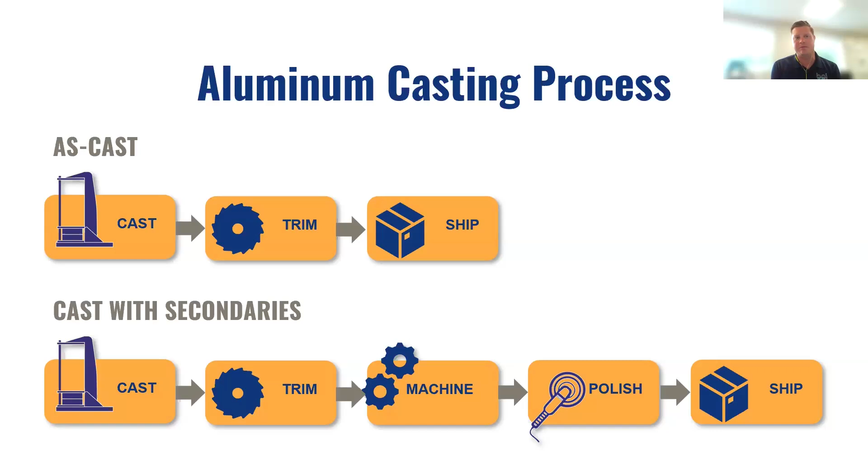So with a lot of the different operations you see there, are there any benefits that you would say for permanent mold or sand casting or die casting as you get into the conversation around machining? So when you're looking at machining across sand, permanent mold, and die casting, we'll start with sand. You're going to need more of what we call machine stock allowance, extra material that can allow for some variance going from casting into machining. Whereas on the far end with die casting, you're going to get closest to the shape you want, near net shape on the casting.

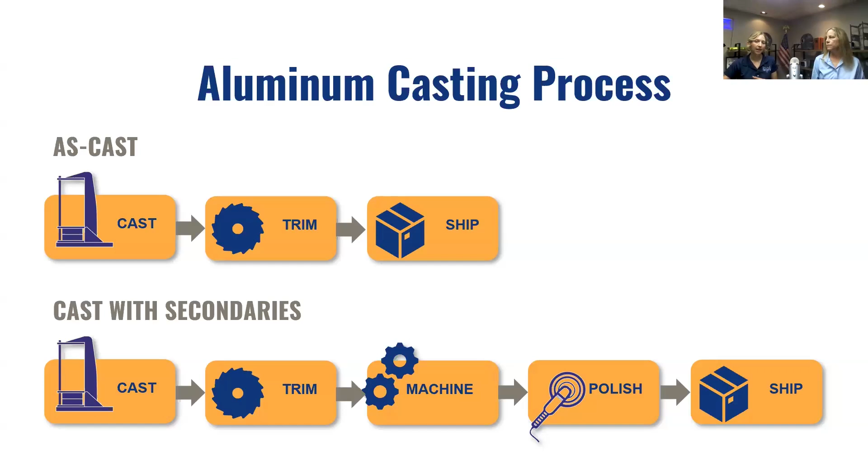So you can go with almost minimum to no machining on a die casting, depending upon what the part looks like. You might just have to do drill and tap holes with die casting. But there is one caveat, and that's the size restriction when it comes to sand versus die casting. Permanent mold falls right in the middle, a little bit of a sweet spot where you can get tighter tolerances than a sand casting, but not quite as tight as die casting, and you can hold a larger volume part.

So with that, different casting processes lead to different benefits, pros or cons from both sides, right? So talk a little bit about why you would need to machine a casting if you're designing a casting coming out of the mold. Is it ready to be assembled?

I think there are instances where the parts are ready to be assembled, but often we find that our customers need features added or removed on that particular casting. We can talk about features such as tapped holes, through holes, cleaning up the plane of the part so it may match up to another part. And we're able to apply better tolerancing when we machine it as a secondary operation. So that's a benefit there, Tim. Stephanie, I think this morning we actually had a really good conversation around this too.

Going back to the design of the casting, you mentioned some of the hole features and reasons why you would machine from that perspective. But sometimes there are features that you need to get a casting out of the mold, or the way you need to produce it from the casting perspective, that might not fit the final product. Can you talk a little bit about that?

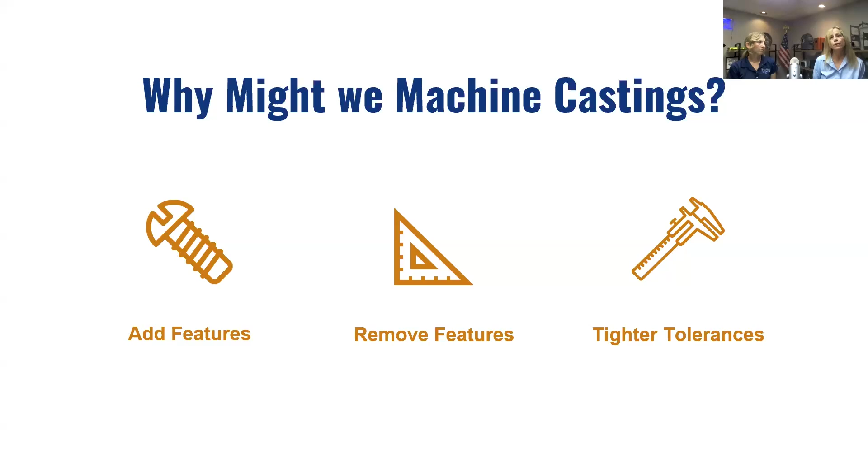Right. So Batesville Products specifically has a 3-degree draft that's necessary for our parts to eject from our presses. If a customer calls out for something less than 3 degrees, we're able to machine that material away from the casting to create the tolerance needed for our end users. So what would be an instance where your casting comes out and you want to put it into an automobile, or on a lamppost, or attach it to whatever your end application is?

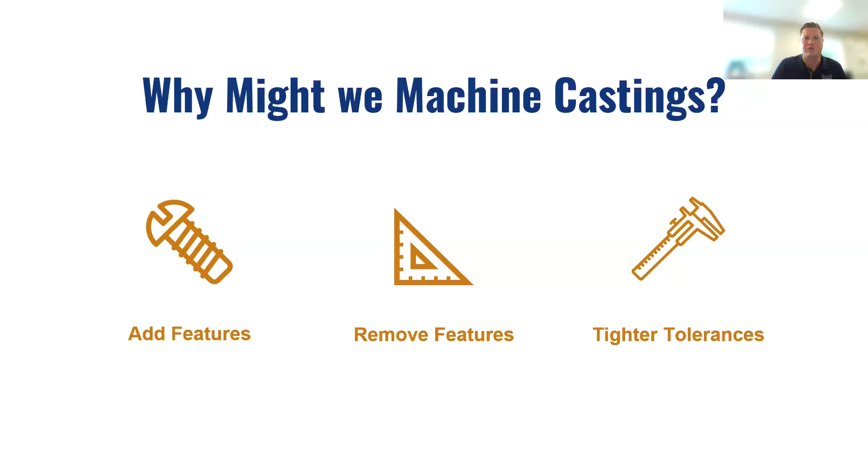Tolerancing is obviously a very critical feature, a very critical point for end customers, and you're not going to get the same customers having items where they're coming off ready to assemble. So oftentimes you get into the tolerancing side of it. Can you guys talk a little bit more about that side of the machining?

Yeah, sure. So with permanent mold specifically, you're going to have to add different types of tolerancing based off of the parting line. So you're going to have a tolerance that goes from one parting line to the end of the casting, or even crossing over the parting line. So for example, when you're ejecting a part, your parting line is going to look like this. It's almost going to come to a cone so that you can cope and drag, pull the part out of the mold.

So depending upon the length of the part, you're going to have to add in more draft, less draft the longer the part is, and the shorter the part, more draft. So that's going to be some specific tolerances you're going to need to help eject the part, and then you can go ahead and machine some of that off if you don't need that draft.

And then also, for example, when you machine a casting, it's a near net shape. You're not going to have 100% the part you have designed finished when it comes out of the mold. So that's why you add machine tolerancing on, so that you can go in and finish it to the spec that's needed. And we always say it's really important to call out what your critical features are and what is maybe okay to be as cast, because then it's going to give you a little more allowance.

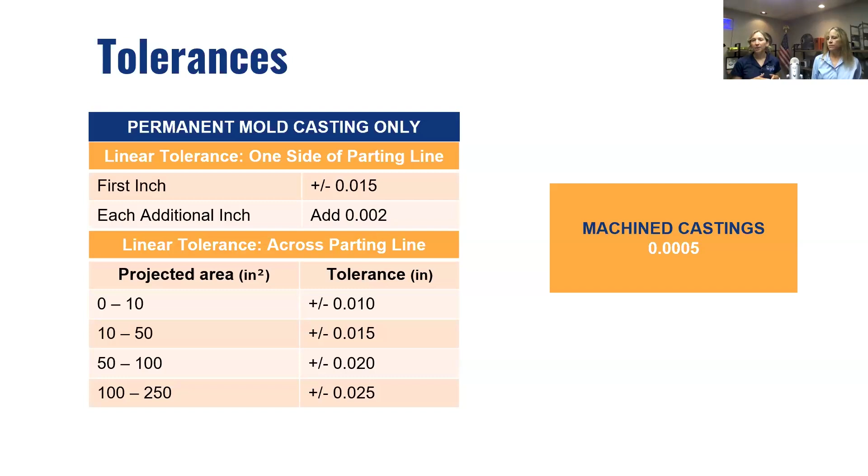At BPI, we use only one material, so we know exactly what type of materials we're using, and we use continuous melt, so we're not cross-contaminating materials. So we also, for example, at BPI, have material certifications that come with the metal as well.

Absolutely. Stephanie, can you talk a little bit more about when a client or a designer would explore machining aluminum casting? Definitely the sourcing, if we wanted to talk about that real quick, Tim. Batesville Products is a one-stop supplier. We offer the casting and the machining. When an individual is designing this part, they should consider its end use.

...and would likely want to come to us after the prototyping phase so that we can institute a long life part. Rachel, can you speak to benefits that you see? So Stephanie had mentioned sourcing. So if you have a shop that kind of does the full gamut, what benefits would you see if somebody is doing both the machining and the casting?

Well, you're keeping all of the quality contained to one supplier, so you're not having to manage multiple suppliers and then the finger pointing of who is in charge of handling the issue. Is it the caster or is it the machine shop that caused the issue? When you have one source, you're keeping that all under one roof, and they can more than likely solve the problem before the casting even leaves their facility.

And then also when your foundry is machining the casting, they have a better understanding of how the mechanics of the casting works. So like all the different types of flex that you see when you're machining a casting. So for example, when you're clamping a casting into a machine and then you're releasing it, it's going to have some of that bounce back, and they're going to understand the type of tolerances needed for when there's parts under tension versus when it's not in your machining.

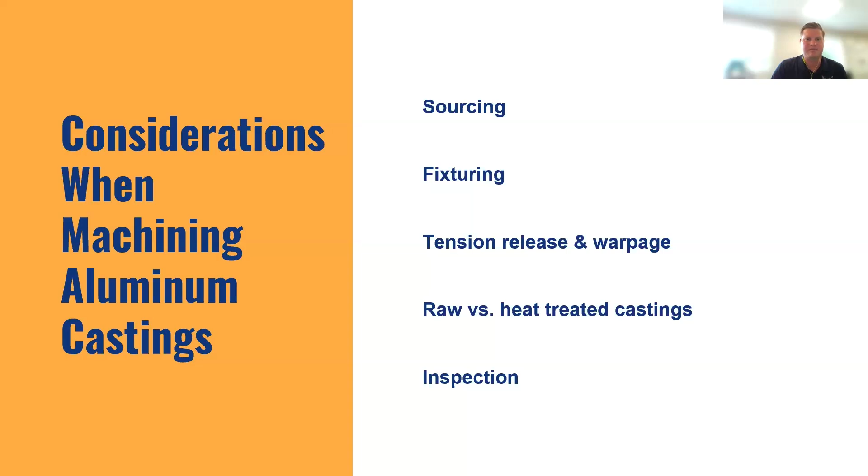Is there a time where you would cast a product, Stephanie, and you would make it bigger than it ends up needing to be? Yeah, absolutely. Having the machining centers that we do at BPI allows us to design that way. It allows us to capture the cope and drag that's needed and the sidewall tolerancing that's needed, and also allows us to create a functional part for our customers.

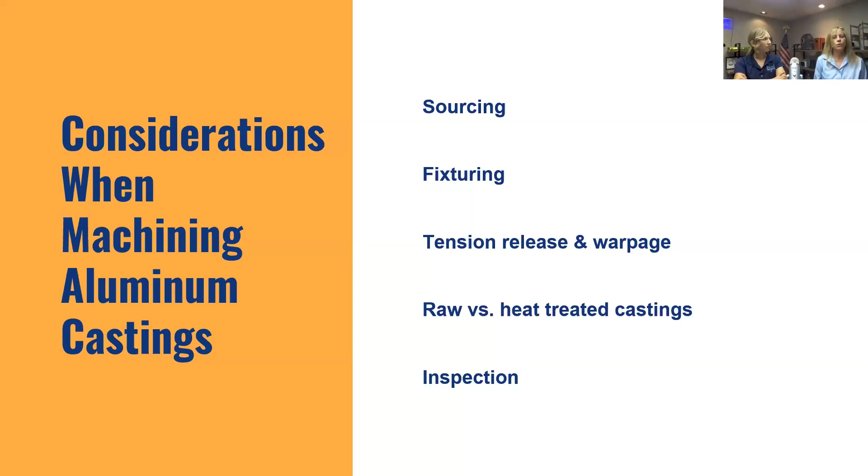Absolutely. So we talked materials, we talked processes. What would be some of the differences that you would see from machining out a billet versus a cast product? I think we can talk about aluminum bar stock for the most part. Yeah. Billet in other terms. Casting from ingot is obviously the permanent mold process, but on the machining side of things, that's a much longer process. It's obviously usually high dollar, especially in long run production. So we usually advise to do the prototyping portion out of billet and then transfer that design, once signed off on and the FAIs are completed, to a cast situation.

Yeah. So I believe that virtually every material can be fabricated or machined, and the same would go with the permanent mold situation. We only cast A356, but we know that there's iron and steel castings. And when you're talking about material differences, strictly aluminum, machining from billet versus casting from ingot, billet goes through a different process when you're creating it than it does from ingot. So, for example, you're gonna have different grain structure when you're getting a machined part from billet, as well as slightly different mechanical differences. Granted, I'm not a metallurgist, so I'm not going to go into the details of it.

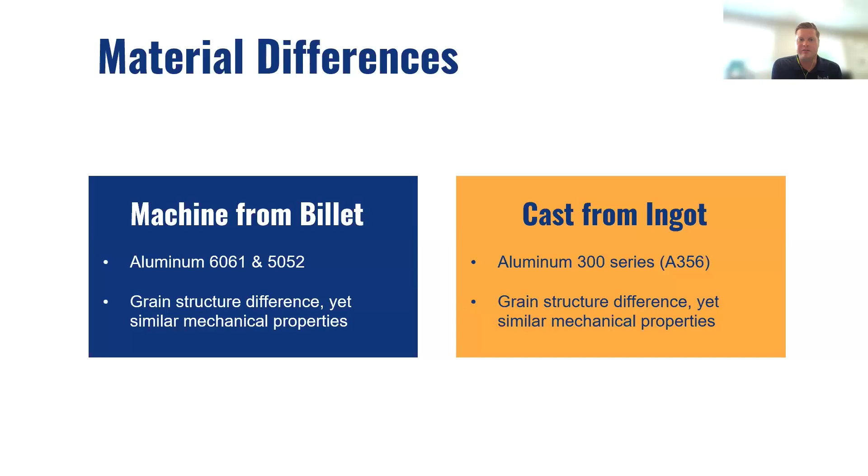And there's also going to be more gas in the cast part than there will be from a machined from billet part. That's correct. I think that's a good point, Rachel. Not all materials are going to machine the same. So when you're talking billet from ingot, but even if you're talking, what you had mentioned earlier, A356, and then you heat treat it, it's still going to machine differently, even though the material composition of that aluminum is still the same. There's different impacts that you get from those processes as you continue down the line.

Can you guys talk about the differences you may see from a design perspective? Yeah, so for machining from billet, you're going to be limited on the size of the billet that you purchase, and then also the footprint of the machine. But with that being said, you can get down to extremely tight tolerances when you're looking at a machined from billet part, but you're also going to get cost that comes with it.

Now, when you're machining from a cast part, you're looking at a different size range. So you're not limited on the size of the casting unless you're looking at a specific casting process. For example, you can cast as large as you want when you go with a sand casting. But with that being said, there's features that are going to have tolerance requirements so that it can cast properly that you're going to have to go back through and machine out.

But that being said, you're going to have a lot less machining to do and a lot less material waste because you cast to shape and then you machine in the features that you needed after that. Whereas when you machine from billet, there's a lot of material waste that happens.

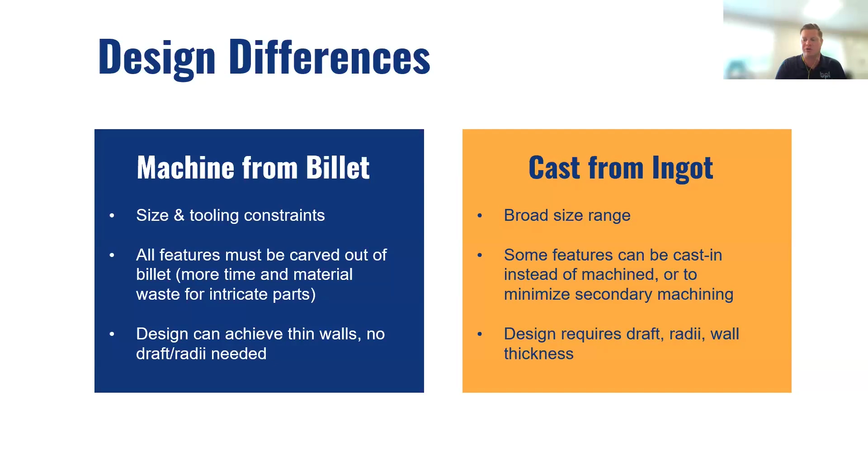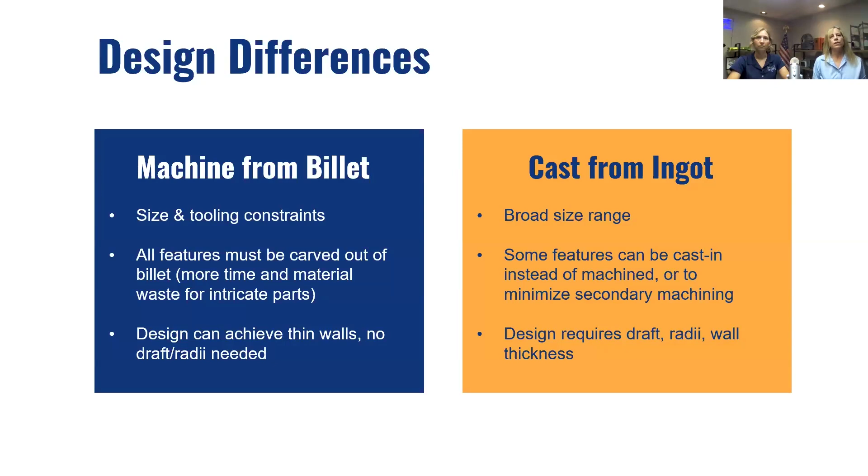With that being said, it sounds like there's pros and cons to both. Can you guys talk a little bit more about why and when you would choose one process versus the other when it comes to billet or casting? I think really it comes down to quantities; that's really where we see the difference, and whether you see a return on investment with one process versus the other. So you're not going to want to tool up if you're looking to make 3 to 5 parts in the whole lifespan of the product, to a certain size extent, of course.

So, for example, prototyping would be a great way to go forward with a machine from billet. But I will have to say there's a lot of foundries out there who are now starting to do 3D prototyping, so they can 3D print sand molds pretty easily so that you can cast the part for prototyping. So I think really quantities and the complexity of the part really drive what process you're going to choose.

So do you guys want to talk about the difference there between benefits you get? Rachel, you mentioned quantities. You guys want to talk a little bit more about what benefits you see from a casting perspective than what you see on the billet side? Sure, go ahead. Well, I was just going to speak on the material waste.

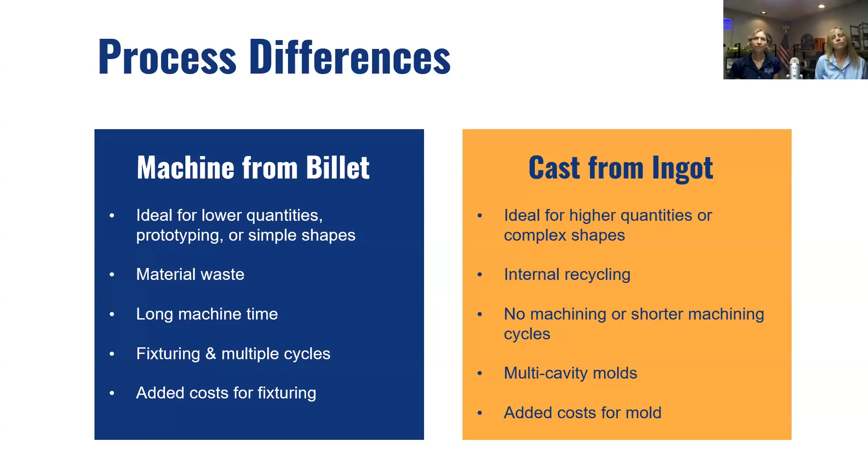Right. Removing the porosity levels in our mixtures, which BPI has automated now, eliminates any gases or any defects that could be hidden inside the part, which would then reduce its tensile strength. Yeah, I think Mike, to add to their comments, really doing an FEA analysis on your casting helps you understand if you're going to have shrink or air entrapment or anything that you can solve out of the casting prior to cutting the mold.

Knowing, as Rachel and Stephanie had mentioned, the composition of the material that is certified within that specification, as well as the heat treatment, and understanding the impact that has on the overall casting, the material composition and really strength properties you can derive from that. But as they mentioned earlier, there's testing processes on the back end as well, using mechanical testing, using X-ray, to go inside the part and see if there are air entrapment, porosity issues, shrink issues, really trying to solve those out of the process.

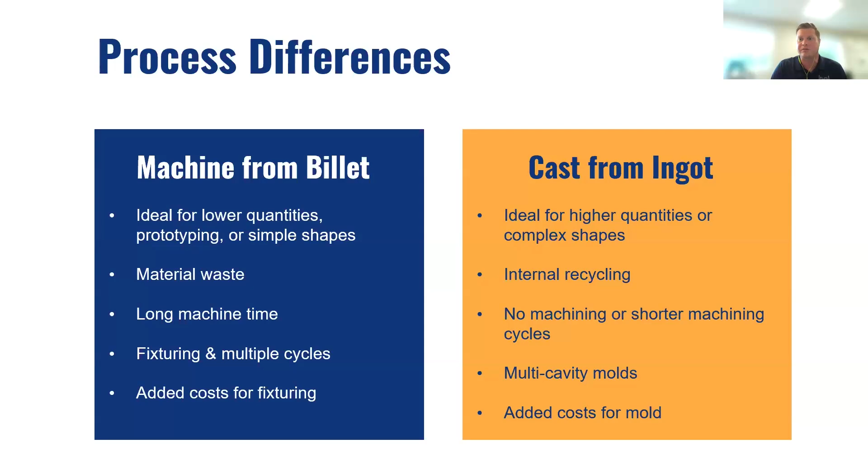And not to negate the fact that a machined part would also have to be heat treated as well. If it's from 6061 or 5052, that item after creation would have to be heat treated. Yeah, I think that's a good point, Stephanie. Obviously, we do a lot with 6061 from a fabrication, a billet perspective that is extremely comparable to an A356 cast material, or what you would see as an A380 in die casting.

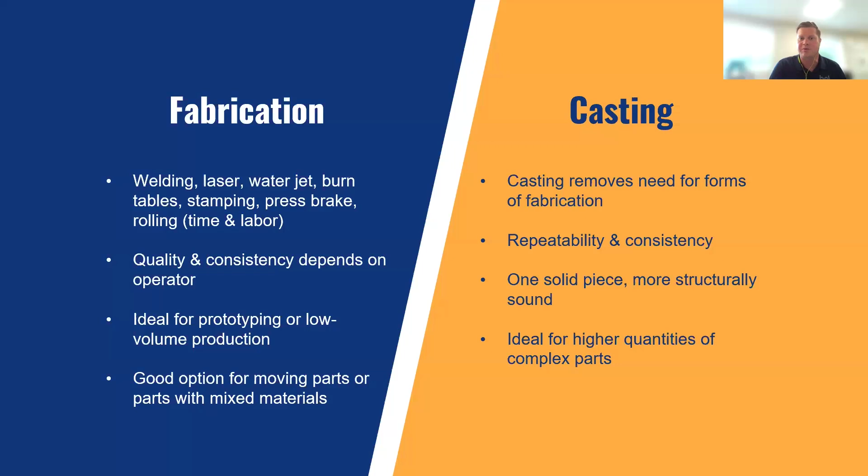Yeah, Tim, I think that's where the professional engineering team comes into place, right? So anybody that does business with BPI has our engineering team as a resource to help guide them through the design and all the features that Rachel just spoke about as far as the mold's concerned.